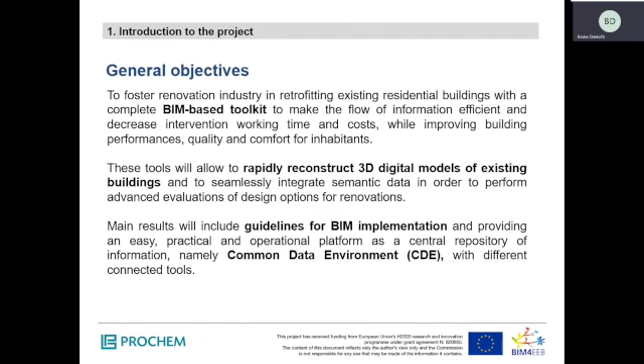I don't know if you have other slides or it's up to you, Jaroslav. Yes, so Bruno, I can follow the slides. Thank you very much, Bruno. Bruno is of course our project coordinator. So thank you very much for the sentences about the general objectives. You're welcome. Thank you, Alexander, and also Jaroslav. See you. Thank you very much, Bruno. Okay, so

What was our overall work plan? Basically, our project was divided into 3 phases: phase 1, 2, and 3. These days we are in phase 3. We are finalizing the project, but a lot of work was done during phases 1 and 2. We started with phase 1, which was to gather the requirements from the end users. Also, some technical research about linked data and ontologies was done.

After that, technical partners created the toolkit, a few tools that are also related to each other. So after gathering the requirements from end users, the toolkit was created, and in the end, phase 3 is to demonstrate the toolkit on the 3 demo sites picked for the project, the best representatives of different climate scenarios. We have the Italian pilot site, which is South Europe, the Finnish demo site, which is North Europe, and of course Poland, a Central European country.

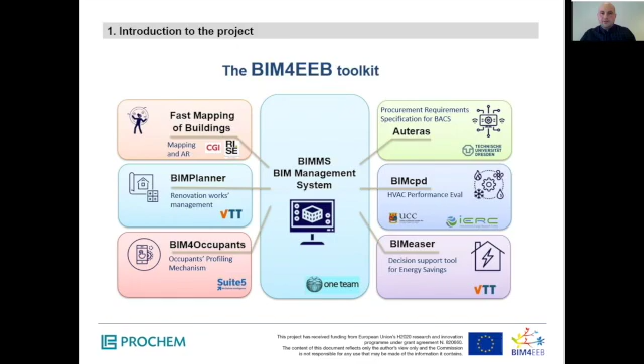And we have BIM Planner for renovation works management, and for the end users, the occupants, we have BIM for Occupants, and this platform will also be presented in the third part. So in the Polish case, we tested the BIMMS platform, fast mapping of buildings, BIMcpd and Auteras, and BIM for Occupants. Okay, we can go to the second part.

I will present the Polish site, the Polish building. The location is in Chorzów. Chorzów is near Katowice, in the south of Poland. This building is the oldest of the three buildings included in the BIM4EEB project. So we have a very old residential building. It was built in 1902. It has 5 floors, including 12 apartments and 3 commercial areas on the ground floor.

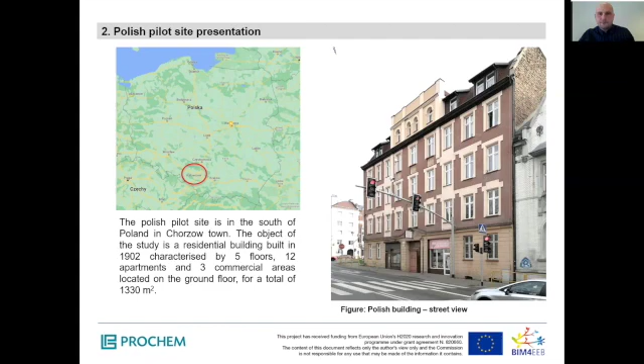Okay, what was the scope of the demonstration activities? In the beginning, to fulfill the project requirements, we had to install a set of sensors inside the apartments which joined the BIM4EEB project to measure conditions inside. And then these measurements were translated into our platform, and then we could assess the special indicators to show the result of the project.

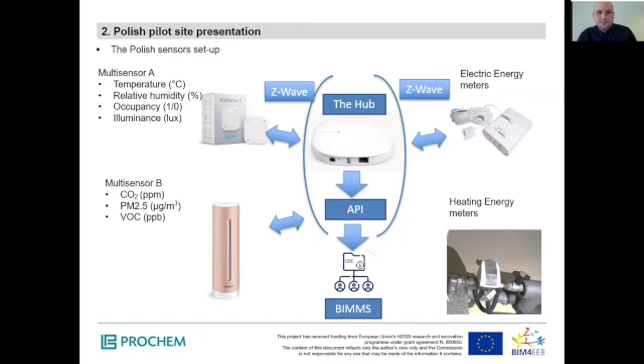And of course, for the project purpose, we had to use also the heating energy meters measurements to assess our project indicators in the final stage. You can notice some pictures from the installation. So of course, we have different apartments, different people, different size of apartments, and we have additional requirements from them.

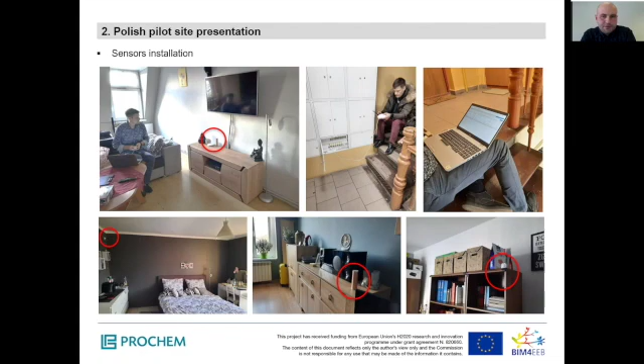Additional requirements also about the placement of the equipment. But anyway, the inhabitants from the buildings were very helpful for us, and I think it was very interesting from their point of view to be part of such an interesting European project. So after the installation of the sensors, this is the setup for the Polish case of the sensors. So mostly we have sensors in living rooms and bedrooms.

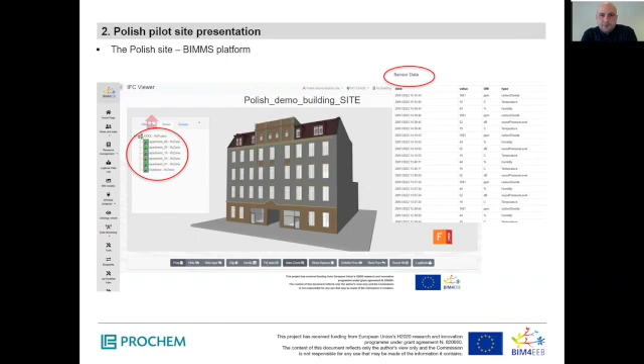And after the installation was finalized, we could start to demonstrate the tools on the Polish pilot site. In the third part of the workshop, there will be a deeper presentation of each tool, but just to give you a notice, the central platform is using the sensors data integrated in it, and for the renovation scenarios, we can use it easily by accessing the platform. Also, BIM for occupants and BIM-CPD are using the stream data from the sensors.

Additionally, for BIM for occupants, which is the platform for the inhabitants, we managed to provide a dedicated workshop for each inhabitant to show the possibilities of the platform and make it easier for them to take part in the project, because we are using the end users' feedback to assess the major indicators of the project.

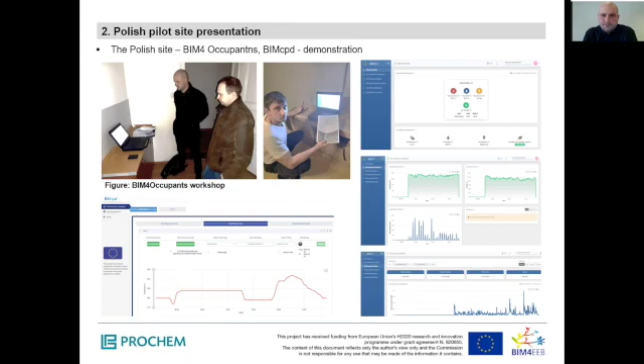And also in the Polish building, we have tested a very innovative toolkit, I would say, not only for the inventory stage, but mainly for the inventory stage, which is the fast mapping toolkit. Eva in the next part will present this in detail, but it's very interesting, and it's using laser scanning, and with importing to HoloLens, you can do a 3D inventory inside the virtual world. So I think this is the last slide in this part.

Do you have any comments on this stage? So I think we are in time, and on this part, I will ask Davide from one team to present the BIMMS platform. Davide, the floor is yours. Do you hear us? Yeah.

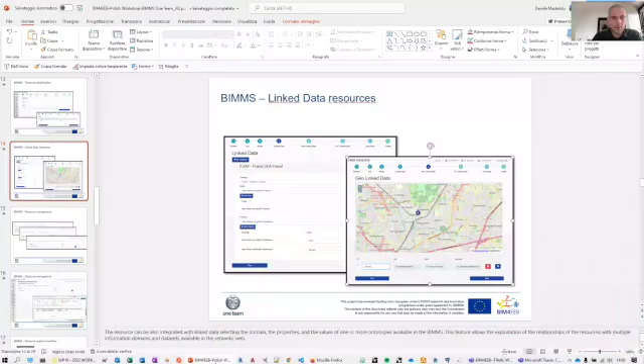Good afternoon, everyone. I share now my presentation. Okay, do you see my screen, I think? Yes. Okay, perfect. I leave out my webcam just to optimize the stream.

Okay, the BIM management system, as seen before, is basically the central part of the toolkit developed in the project. Basically, the main goal of the BIM management system is to optimize the information management, optimize how the data is managed, because we know that in buildings the data is so much, the life cycle is very complex, and if we do poor management, this could hinder strategic decisions and also the collaboration between parties.

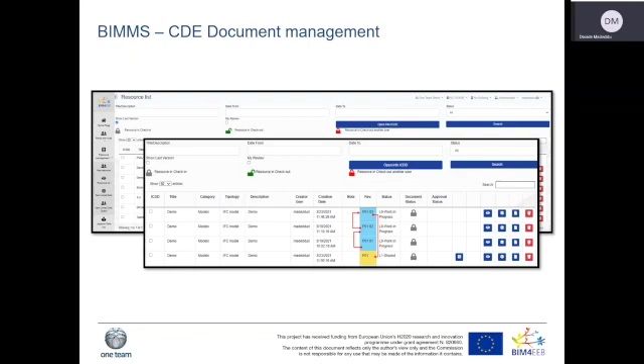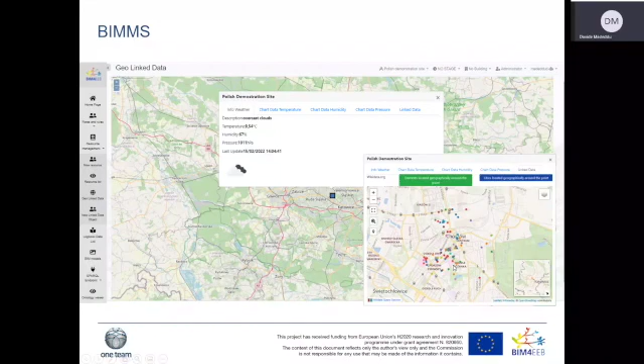Another important thing is that there are some functionalities that support the possibility to locate resources geographically, for example, the model, but also any kind of resource like a document or anything. And this is the screenshot where you see some locations of the resources in the Polish demonstration site, starting from the weather information, but also going down in the right side panel, where you can see some information about the important buildings that are nearest the main building, the demonstration site.

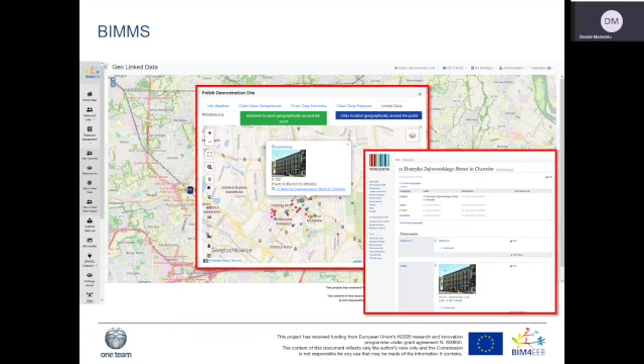For example, in these functionalities, you can ask the platform to give you all the important buildings that are located around the point where your building is. And you can see these buildings categorized by different uses. For example, there are church or institutional buildings. If you select one of them, you can get all the information that can be collected, for example, from Wikidata. Wikidata is an important database that stores all the data of Wikipedia. These functionalities can be used, for example, in design to get information about the nearest buildings to your design.

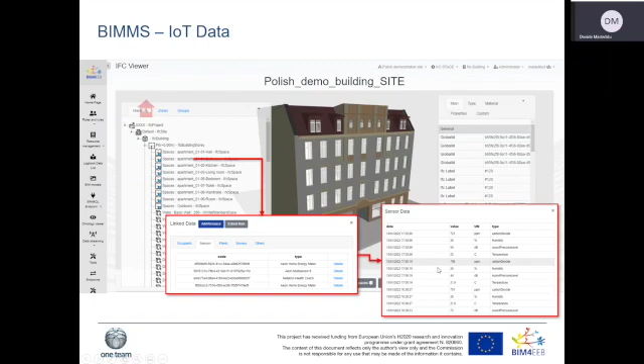We talked about IoT, talked about sensors, and here is the data that will be collected from inside apartments. Some apartments can be used as a demonstration. We put sensors, and in the BIM management system all the measurements can be stored, to be recorded and analyzed by other tools, like for example BIM-CDE and some others that you will see after my presentation. This data can also be viewed by selecting in 3D the space where you get the details of the sensor installed and also the measurements. This could be very, very helpful for a user to select visually where the sensor is and what the measurement is.

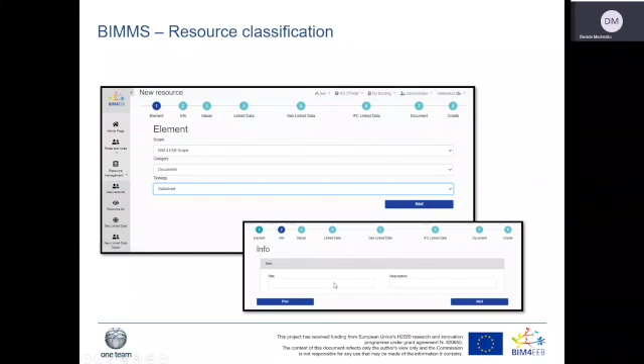Another important thing is that as a common data environment, we store the documents, but we need to classify these documents to better filter and to better identify the typology and category of the document, and also to make links between documentation. And when you store something, you can also add what we call linked data. Linked data is an important technology that is very, very powerful, that allows you to link, as the name says, any other data that can be found on other servers or other resources over the internet, and you can link this data together, and also give, as we saw before, a geographical location of where your data is.

And all these things are recorded, so you can also see the history of your document, where you can see which version the document is, when this document was created, and which people edited the document, and also add comments about that. This is important to see which user did something and shared something with someone.

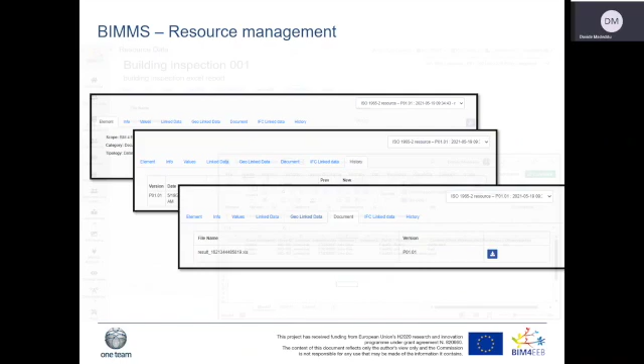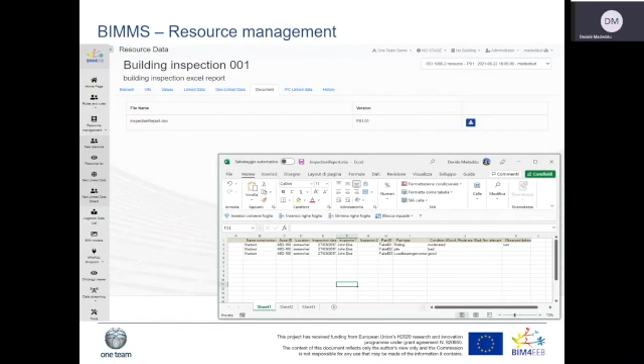And finally, about which kind of data can be put inside the BIM management system, we can put BIM models, basically in the IFC interoperability format, but you can also put any kind of documents, for example, Office documents, PDFs, Excel files, PowerPoints, images, and others. An important thing is that when you work with a team, some things need to be approved, and you can create approval workflows where you invite someone to approve some resources, and when the resource is approved, it can be shared and also published.

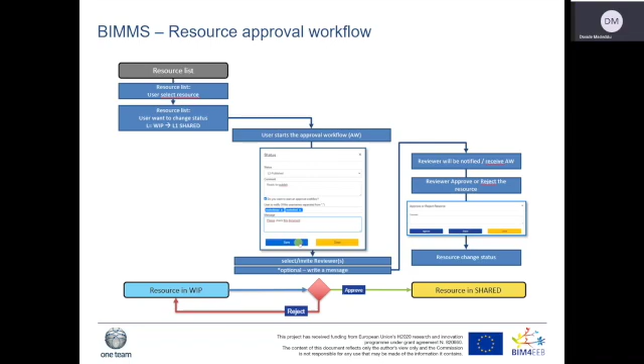This is something that is very, very common in design workflow, and this could be done in the BIM management system. We don't have much time to explain all the functionalities very well, but here there's a small video where you see the kinds of activities that can be done by the user. For example, creating resources, uploading the documents inside, viewing all the details.

And we can think that, for example, another user can log in to the system and also share their things, and make an approval workflow to get information and feedback about the documentation. All the workflows, data and functionalities are completely compliant with the new BIM standards, that is ISO standards.

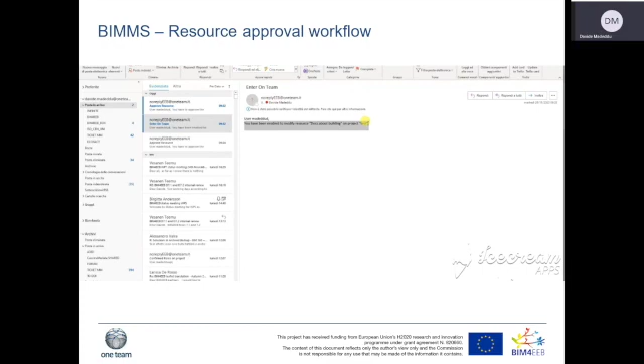Another important thing that you see now in the system is that for things you upload or activities you do in the BIM management system, there are functionalities that inform the user by email about the changes inside the BIM management system.

Another important functionality is the building logbook, another buzzword in this topic. It is a functionality that allows, for example, the owner to have every information about the building, starting from the documents or anything that happened in the documents, completely stored inside the BIM management system. This could be helpful in operations during the life cycle of the building.

And last but not least is the linked data SPARQL endpoint that allows registered users to access the data stored in the BIM management system in the form of linked data. Basically, we use linked data stored outside the BIM management system to retrieve some information, like the example before about Wikidata.

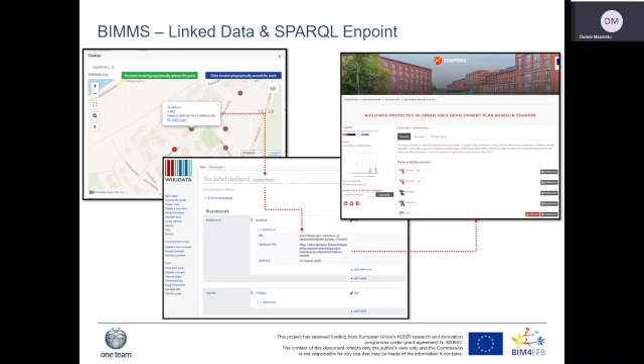But the data stored in the BIM management system can also be shared outside, giving a public SPARQL endpoint to any registered user to access the data inside. As we see, this is another example of how to use linked data. We can retrieve and share data to make some comparison or replace something inside.

An important thing, just to conclude about the functionalities and results of using the BIM management system: we elaborated some functionalities that allow, for example, storing the data of the BIM model. As you know, BIM models are sometimes very complex, and creating information in them is sometimes time-consuming. The traditional way is sometimes a bottleneck in upload and download. When you change something in the model, you have to upload the BIM model, and when you share it with someone, these people have to download it, and this continuous upload and download in the design chain is a bottleneck.

So we created a system where, instead of uploading and downloading files to share data, we use the REST API, where all the non-geometrical data can be shared using the REST API with the POST and GET methods to just exchange the data. This allows saving more than 70% in time and makes the design phase faster than before. We tried that with some things in IFC, and we want to expand.

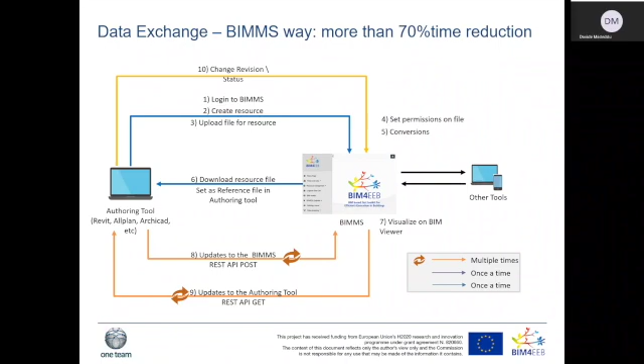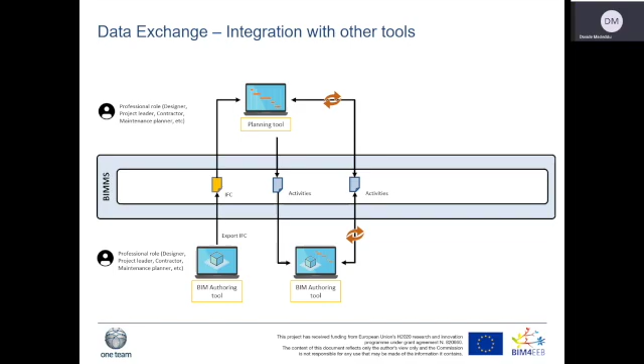And finally, we elaborated systems that can connect the BIM management system with other tools, first with the tools you saw in the presentations today about the BIM4EEB toolkit, but also other external tools like existing BIM authoring tools, planning tools, and every tool that can exchange data using APIs. This is very interesting because it allows exchanging data in a centralized, more efficient way.

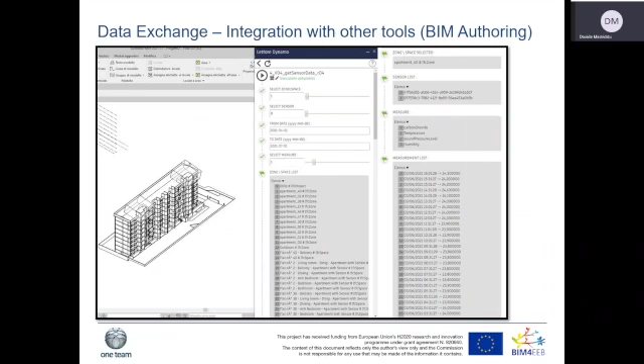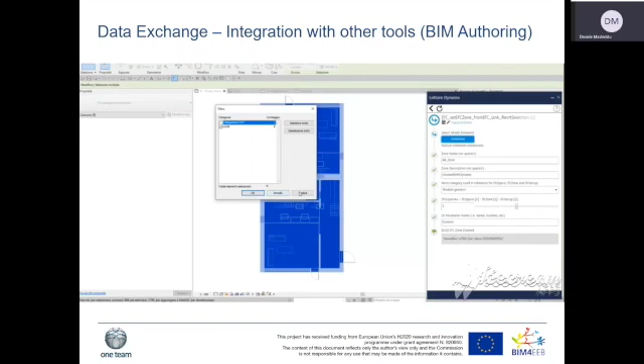This is an example using one of the most used authoring tools in the market, where you retrieve, for example, data from the BIM management system, from sensors, getting the graph of the temperature, or also creating things inside the BIM authoring tool. In this video, for example, we create spaces or some subdivisions inside the BIM authoring tool and post these changes to the IFC model already stored in the BIM management system.

And using the REST API, we make very fast changes in the model, avoiding repeated download and upload of files, which can be more time consuming.

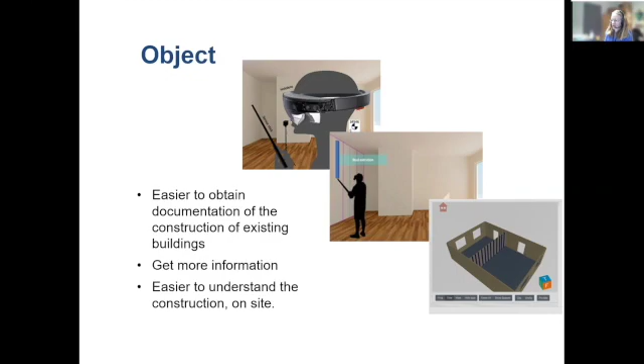By having this in a 3-dimensional model, it's easier to understand what you have and how the building looks like. So how is this possible, and how will this toolkit work?

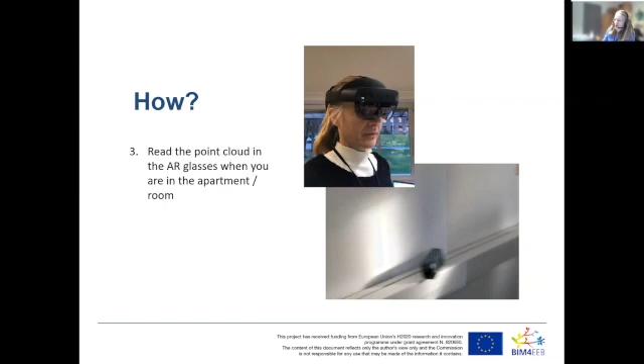But I also told you that this toolkit should give you more information than just the geometry. Because when you have the point cloud in the glasses, it's possible with your normal finger to click the corners of the point cloud and define it, say that this is a wall, click the corners and say this is a ceiling, this is a floor, and this is a window. Then the computer knows what it is, and it could create an IFC file of it.

By measuring those characteristics, you can detect if there is moisture or water pipes within the wall, because the sensors measure the difference in density and also the resistance of what's inside the wall. So by measuring capacitance and inductance, it's possible to detect if there are studs or other things behind the wall. It can also measure electricity activity, like if you have electrical cables behind the wall.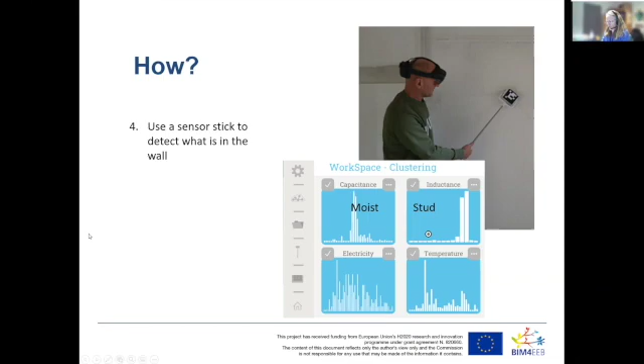Once you have this, you are able to create what you see, because you would like to store it as an IFC file in the BIMS platform later on. So when you have the glasses on, you can see the result from the sensor stick as different colors and dots. You can use the menu in the AR glasses and write studs - you just point with your finger and write the studs. In this case, we write 3 studs on the wall, and you can see they are not correctly placed because it's a bit difficult to have them in the correct place at once. So you have to align them, move them and rotate them so they come into correct position. Once you are satisfied with your creation, you have the possibility to create an IFC file that you then download to the BIMS platform so you can have it with your other drawings.

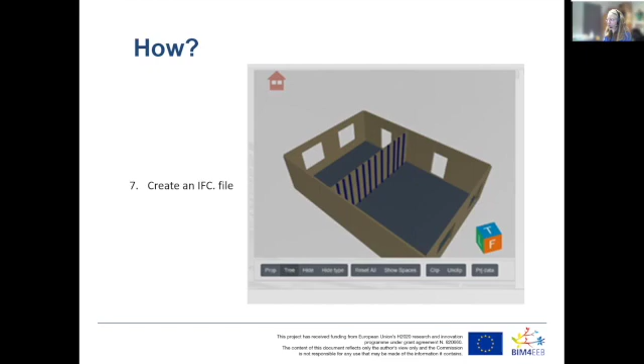I have just a few more slides about this equipment and this tool, what's new and what is already existing.

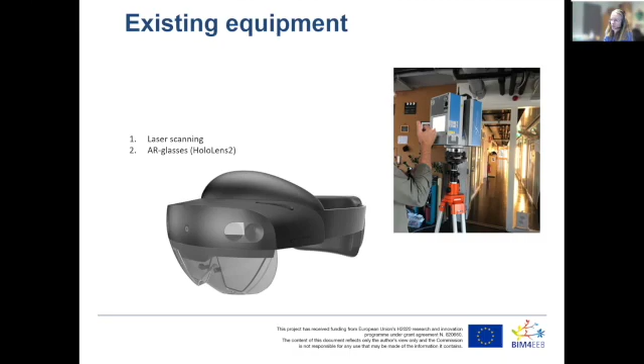The existing equipment, which hasn't been developed in this project, is the laser scanning equipment and also the AR glasses used. In this case, those are called HoloLens 2, AR glasses produced by Microsoft - those are already existing. What's developed in this project is the sensor stick, where all those meters are combined in the stick, and also the software which is on the HoloLens. We've called the software Polytech, and it's a Polytech app within the HoloLens that is used. Those are the two things that are new and developed in this project.

We were in Poland at your demo site in the beginning of February this year, and it was a nice trip. I would like to thank you, Alexander, for your hospitality, where we had the possibility to demonstrate and check the toolkit. When we were at your site in Poland, we made a laser scanning of an apartment on the demo site, and we also used the sensor stick to map and see some of the walls. We also created some IFC objects, not an IFC file of the whole apartment, but objects, because we only had 2.5 days when we were there, so most of it was demonstration of how it worked.

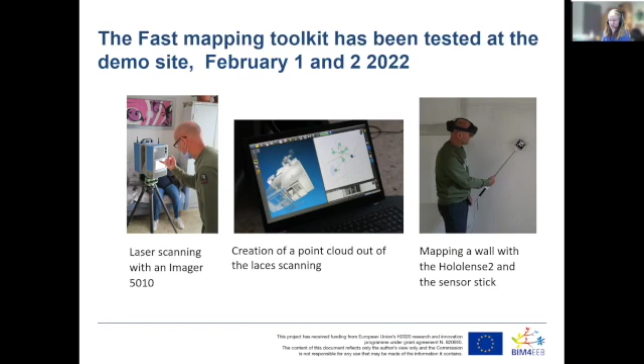Okay, that was my last picture. There are the contact details for me if anyone has questions afterward. Otherwise, please, if you have questions.

Hello everybody, my name is Konstantinos Tsatsakis. I'm coming from Suite5, an SME company based in Cyprus. Suite5 is an IT company, and as part of the activities performed in the project, we developed the BIM4EEB application, an application targeting end users of the building - the owners and inhabitants - as a way to examine the potential of collaboration with these two business stakeholders during the renovation process or post-renovation process.

The overall objective behind the delivery of the BIM4EEB application was to enable building inhabitants and owners to get access on the contextual information of the building environment. So in the project, we installed different types of sensing and measuring equipment in order to gather information that is required for different purposes and for different stakeholders.

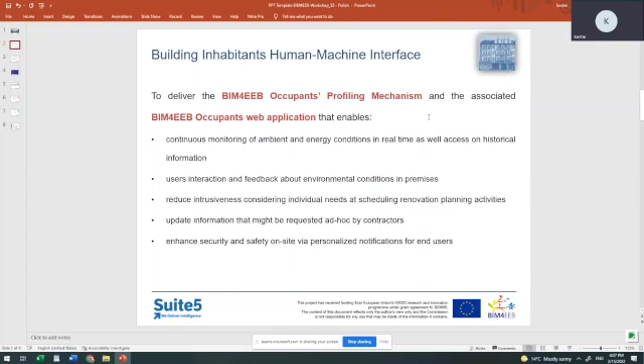This functionality can extend post-renovation, as the building manager may use it to notify inhabitants about specific conditions in the building environment. A final functionality gives building occupants the possibility to provide updates on specific conditions of the building environment.

This is a main bottleneck in the current state of the art, because the typical BIM management process starts with an initial building information model containing specific attributes that may change as the building evolves. The owners and occupants have clear understanding and knowledge of what's happening in the building, so they can actively contribute information related to specific attributes of the building.

For example, when it comes to the operation of the building, it's typical that there is reinstallation of some equipment. The user may install additional HVAC systems, like air conditioning. This information is very critical to include in the building information model to have a concrete model of the building. Therefore, we give building occupants the possibility to enrich the BIM by providing information about specific attributes of the building.

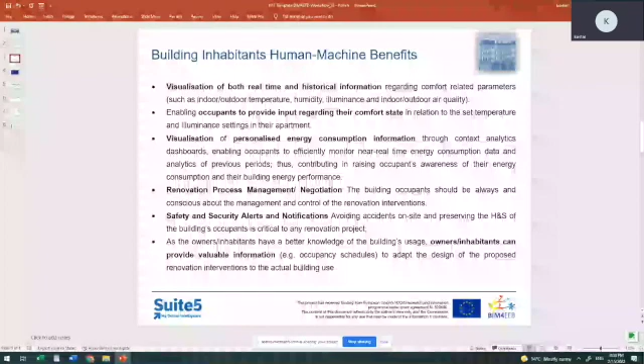In the project, we limited this functionality so users provide information having to do with energy devices. So if there's a new installation of an HVAC system or a domestic hot water system, large consuming devices, the users are prompted to update the information through the application.

I will now go to a demonstration of the application. So we have set up a test account here, and we have already logged in. I will show you later how this functionality works, in order to show you the different features of the application. On the left side of the screen,

you can see. Can you see the screen first? Yes, we can. Okay, good.

On the left side of the screen, you can see the different functionalities that I presented before. So I will not go into the details of each one of them as I presented them before. I will stick to the different views of the system.

So through the My Overview tab of the application, the user gets insight about the indoor environmental conditions of the building environment, getting insights about the different contextual conditions. Information about the temperature, humidity, illuminance from different building zones, either at apartment level or for specific zones of the building or the apartment, is available for visualization.

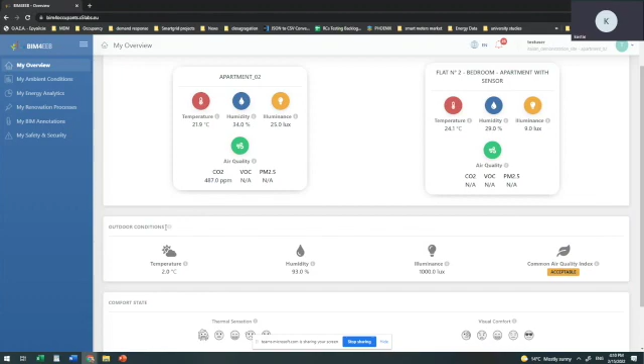As stated before, user interaction is supported by the application, and thus the user of the app may go and select a specific level of happiness, let's say, of preference based on the current conditions. So if the user is happy or not happy about either the thermal sensation or the visual comfort at this current moment, the user is prompted to provide feedback for the current condition in order to express a level of interest for the environment that he or she is placed in.

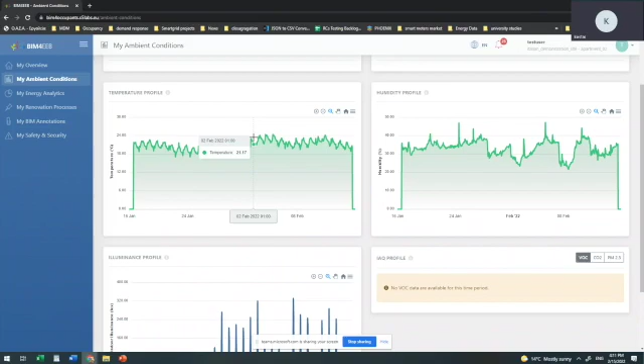Along with real-time information, as commented before, access to historical information is available, and the user can select a specific period for analysis and drill into the details of environmental conditions for temperature, humidity, and illuminance, as well as CO2, where data are also available for monitoring.

Along with environmental conditions, access to energy-related data is visible through the dedicated view of the system. The user has access to the time series of information about energy consumption. Insights can be extracted by monitoring the time series. Aggregate statistics are also visible for the end users.

Also, time period statistics, time filtering is also visible, where the user can quickly access the aggregate consumption at specific time granularity. For example, here by having the week statistics, we have per week the aggregate information about consumption, and thus quick insights can be extracted.

As you can see here, there is a deviation in the week consumption level, and thus the user is getting informed about the trend of consumption during a specific period that has been selected for analysis.

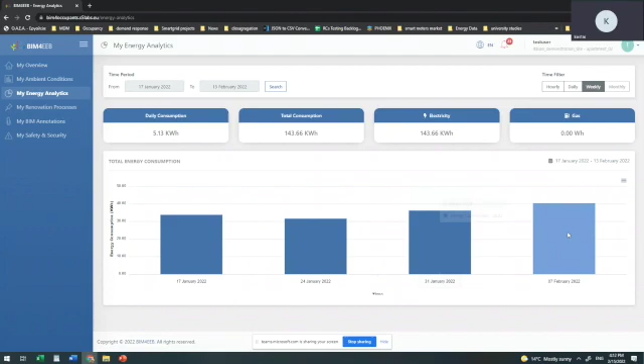For this case, we have past activities defined here, and thus there is no action that can be performed by the user. But the idea is that the user can get into this view and modify, renegotiate specific parameters of interest for the renovation process.

Related to this are the safety and security events that were commented before, where the user is getting insights about specific safety or security conditions. There is a typology based on the status, if we're talking about finished events, ongoing events that are happening now, today, or upcoming events that will happen in the future, as well as a level of importance that is defined by the stakeholder that is triggering the event.

If it's a critical event, if it's not a critical event, and if there's a situation that is of high importance for the building. Also, the user can report a safety incident. Apart from getting insights about safety incidents, the user is prompted to provide information about a specific condition.

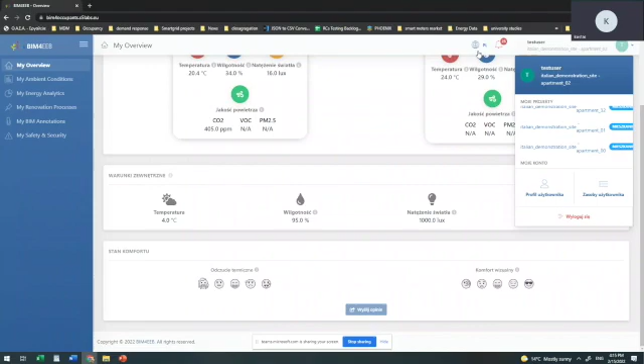Details about the user profile can be defined here, where the user is prompted to provide information about the type of user and the age group, which are mainly statistics-related, for better profiling of the users that are enrolled in the project. The user may delete the account or update the password for logging into the project.

And also we have a view that contains the full list of attributes of entities that have been associated to this apartment, which is mainly useful for the end user in order to define personal names for the different types that are examined in the project, in order to have a more friendly view of the different names that are visible through this application.

I will log out again in order to show also the login functionality of the application. A username and a password is provided to log in. Of course, we have also the sign-up functionality at the beginning, which is very important as a process, where the user is prompted to define a username, a password, and also a user token in order to link the specific user with a specific set of data that is contained in the BIMMS platform that was presented before.

So the BIMMS platform is the one that contains, let's say, the user's database: the full list of users that are associated with specific zones and therefore with specific data. And therefore any other application, and thus the BIM for occupants application, is prompted to exploit this linkage by providing the unique token that is available from the BIMMS platform, copying this information to this application, and then being able to retrieve the personalized data for each user that is enrolled in the project.

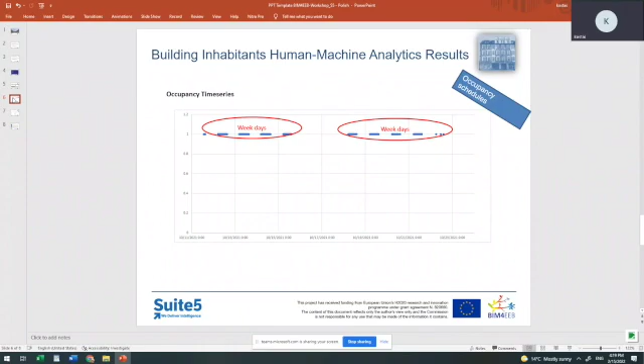Another type of analysis that we're performing in the project has to do with the analysis of occupancy data. We gather details about occupancy as extracted from a sensor that is installed in the premises. Occupancy-related information is further analyzed by aggregating it in order to extract, let's say, data lakes that contain occupancy events. From this analysis, and removing the outliers that we have in the data, we can extract the typical patterns of occupancy, information that enables us to better understand the level of occupancy in the building environment.

The important thing here is that we don't aim to track the occupancy level in real time, but rather to extract occupancy profiles, so aggregate statistics of occupancy, that can help us better simulate the operation of the building. The typical occupancy profiles available nowadays are mainly average statistics from the analysis of a large volume of buildings. But the literature shows that this aggregation does not fit each case, and that it's better to estimate the occupancy level per building in order to have more accurate profiling of the building, and therefore more accurate simulation of its operation.

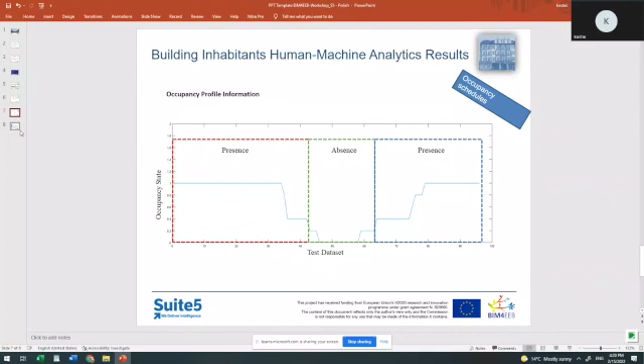And that was the very last part of my presentation.

We have one comment from Mr. Zawistowski. He's saying it was very interesting.

Okay, so the last part of the demonstrated tools presentation will be the BIMcpd platform, and it will be presented by UCC representatives, which is Ion. So, the BIMcpd tool is made up of a few different components. There's the constraints checking tool, the performance evaluation tool, and the data management tool. So we'll go through the data management tool initially.

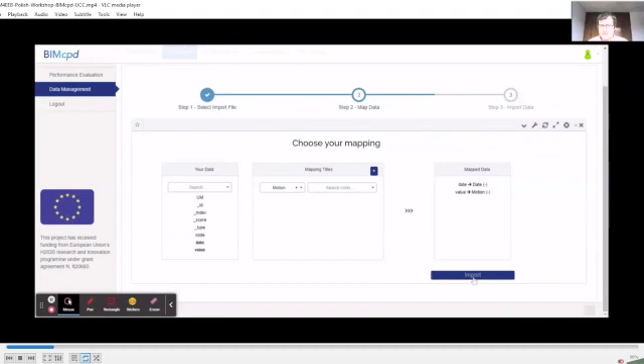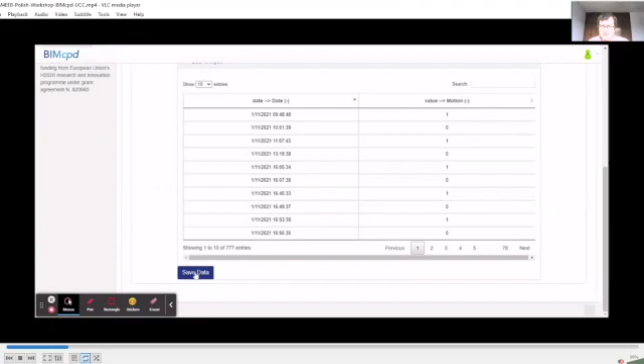So here you have motion data being imported, so it's basically the date and the motion readings of this specific sensor. That can be uploaded into the database, and then all this data can be viewed in the performance evaluation tool, which we'll go into in more detail shortly. Now on the screen, you can select the data that you have just uploaded. That was the sensor data just uploaded to the system, and you can view and analyze it as you wish.

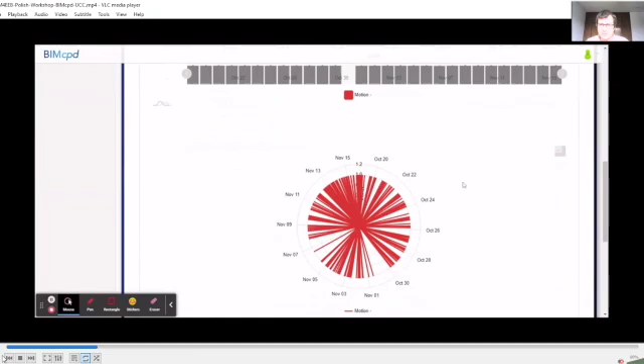We'll be going through this process in more detail shortly again. So it'll just show the data here. That was a CSV file that was uploaded to the system, so you can see all the motion there in that data file.

Another component of the data management tool is the IFC ontology. You can select an IFC file to analyze, and it will then extract all the different components in that IFC file, and they can be searched and sorted as you wish to view what's in the file, and to select which one you want to view specifically.

So then, if we move on to the performance evaluation, that is the next tool. Here, if we look at the different sensors, we've just done a search for Polish, for all the sensors from the Polish demo site. So you can see the list of them here. There are two different ones for apartment 5. There are, I think, at least 3 for apartment 8.

Here we want to compare the temperatures in a few different apartments. That's under the multi-sensor, and we'll also select the outdoor temperature just for comparison. We select the chart type, which will be a comparison chart, and then we select what we want. These are all the different variables that have come in with the sensors.

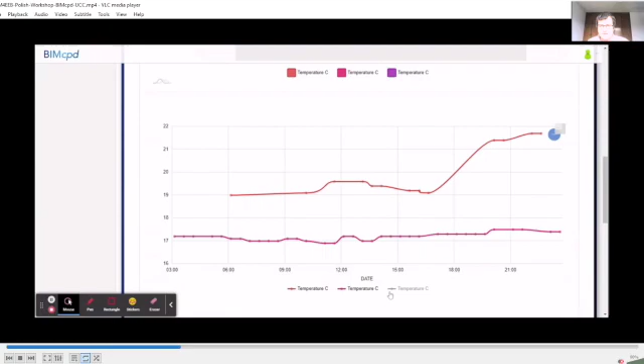So then if we just select out one of the apartments, and we select the temperature and humidity for each of them, we can just check the thermal comfort values for this apartment. So this is analyzing this data, and we'll just see it mapped here. You can switch off, but in the lower graph we can see that the average humidity would be around 50, over 50%, and then the temperature is somewhere around 20 degrees Celsius.

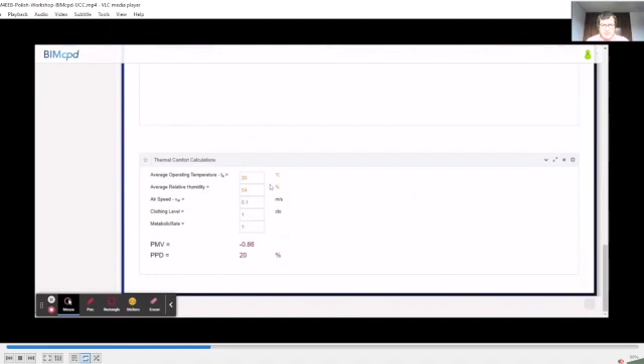So then there's this thermal comfort calculations tool. If it's in orange, that means it has been calculated from the readings that have been selected above. So the average temperature for that day was 20 degrees in the apartment, and 54% was the average humidity. These are the thermal comfort calculations from the Berkeley University thermal comfort tool, PMV and PPD. So you can see that it's not reaching the ASHRAE standards for thermal comfort in that apartment for that day.

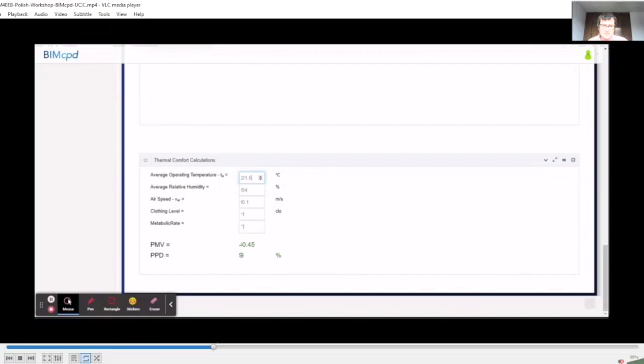So it would have to be changed to 21.5 degrees. So the temperature should be increased by 1.5 degrees to reach the ASHRAE standards that had been set. So that's just for that apartment for one day.

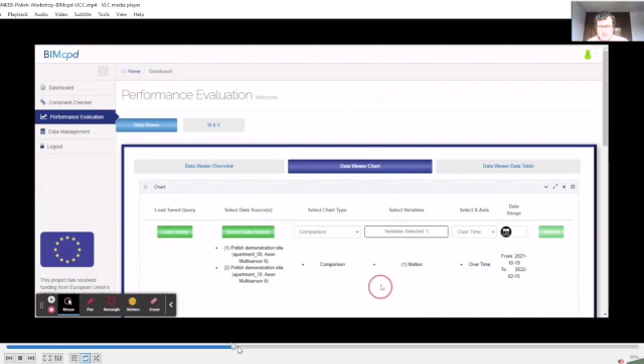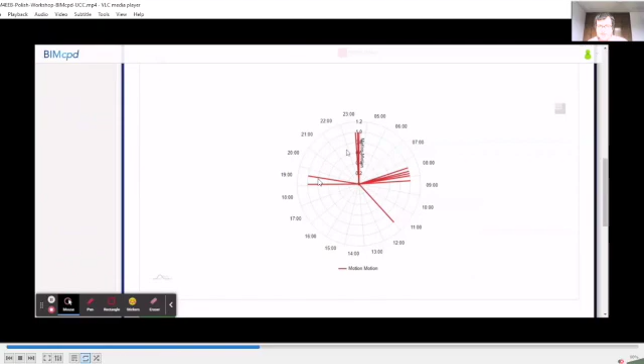Then again, if we check, I think it's this one that you can select in on the motion sensors, and to compare, you can see for that day that the person was out for most of the day, and then at home for some time, and then to sleep again. So I think there's another apartment analysed as well, and again, there isn't loads of movement, but you can see the person is out for most of the day, back for a small bit, and then probably asleep.

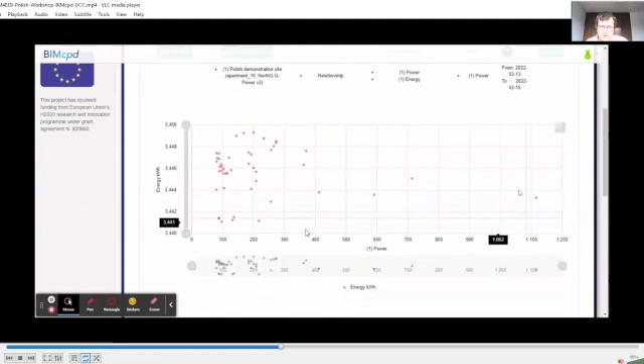You can also compare the relationship between two different variables if you want. So we've done comparisons up to now in the examples, but if we want to just view the relationship, say between power and energy, we can map those against each other and see if there's a correlation. So you can see all the variables there, the data and how it corresponds, and then you can remove any outliers.

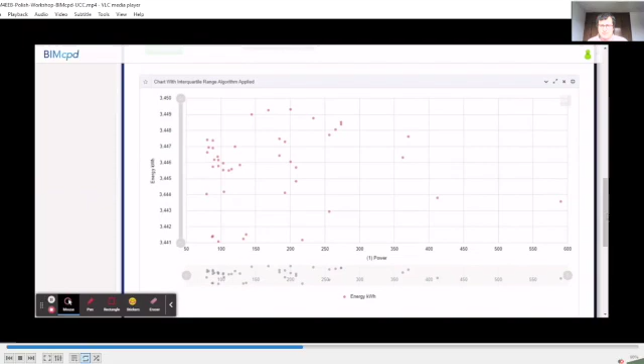So it has highlighted these possible outliers, but if we want to keep most of them and just remove the last two of the outliers, it'll redraw the chart, and then you could save the data if you wish from there. So yeah, that's the data again.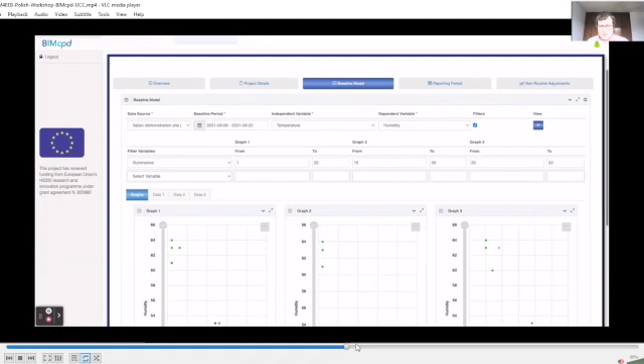So next we'll go on to the M&V tool. So here we set up temperature and humidity, and if we want to set a filter of the illuminance, you set that up. This is setting up a baseline model for a site before the retrofit, and then you click to view, and it graphs the temperature versus humidity. Then you can set up your models, and it will graph those models, and then you have to click whether to accept those models that you've set.

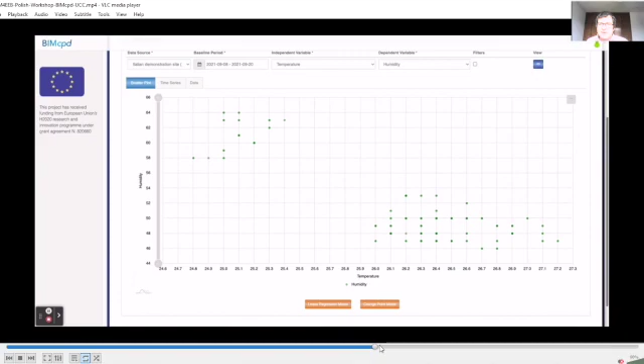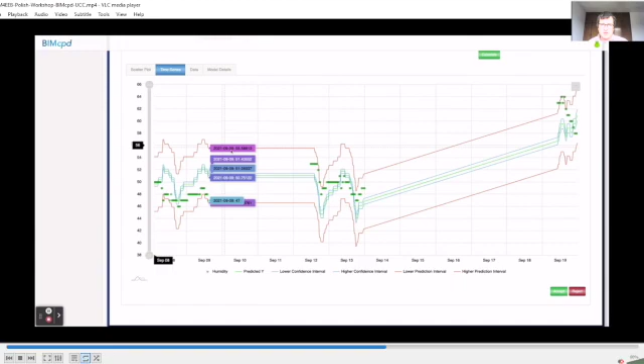So then once those are set up, you run a linear regression model, and you set the confidence interval that you wish, and it will then graph the data and the scatter plot, and you can view it in time series. You can view the data specifically that you want, and then the last one is the model details. If you want to view those details, then you accept the model that has been calculated, and then you move on to the reporting period.

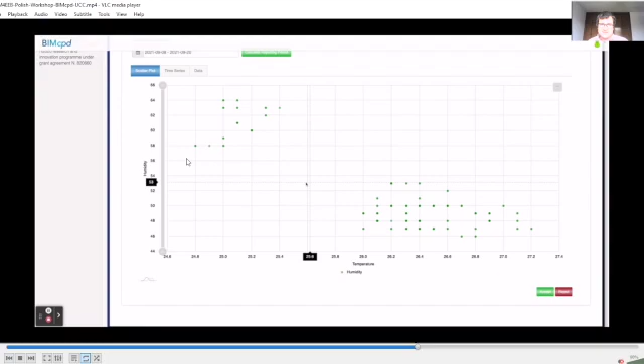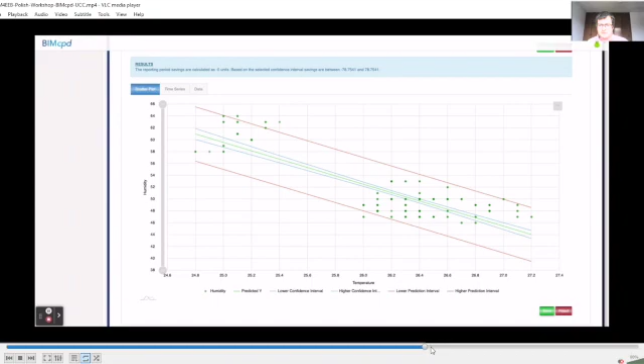You set up the dates you want for the reporting period for the data, and we'll just move it on. Again, you can view the scatter plot, the time series, and the data if you wish, and it will plot the data. And then if there are any non-routine adjustments that need to be made to the data, you can do that in the last section of the tool.

So the last section of BIMcpd is the constraint checking tool. So this is where the HVAC systems and the different components, so lighting components and sensors, optimum locations are suggested for those components.

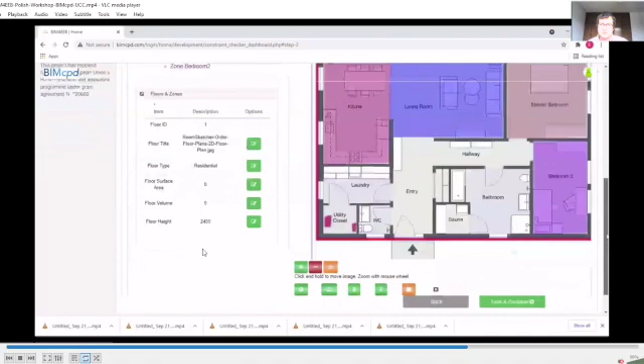So you can set up your project initially and select out the different zones, the floors and the zones you want. So in this demonstration, there's 4 different zones set out. Then you set out the components that you wish to process. So in this example, it's HVAC, sensors, and lighting, and you select out the different specific components that you wish to add to the system.

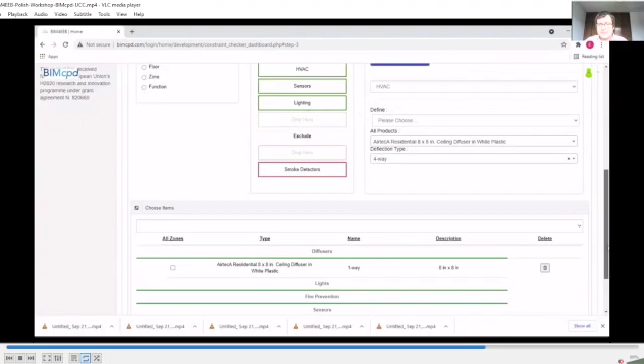So for each of the components that you wish to set it up for. So they're the sensors for CO2, humidity, and temperature, and you want to select the specific products. So then you save and continue on to the next, and it will suggest locations.

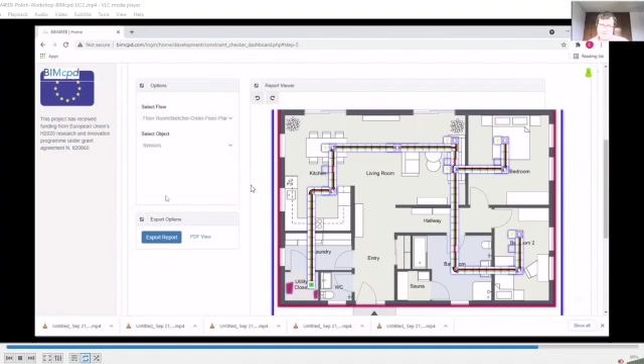So for the HVAC, it selects the ducting and the diffuser points, and similarly for the lighting and the electrical system, it'll set out where the lighting units are and then the wiring system, and then it creates a report based on that, where the placing of the suggested units is drawn, and then it lists out the different quantities of the different components, and you can create a report there.

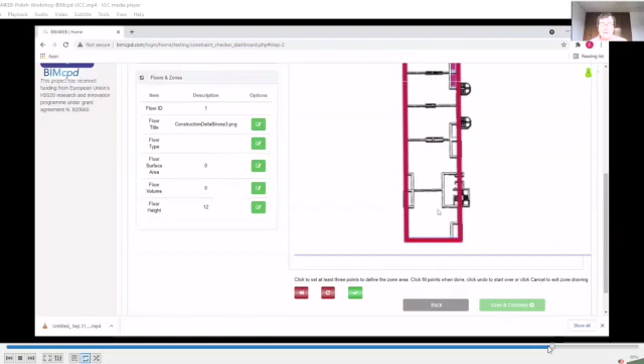So then, just to go back to setting up the actual floors and the zones, this is where you'd do it. So you've to draw out the specific zones that you wish, and that will then be processed. So that's how you do it, and you set the zone type, and you save the zone, and it'll then calculate. So that's for setting it up, and you can set up the different changes, the zone area, the lux level you want, and sections like that.

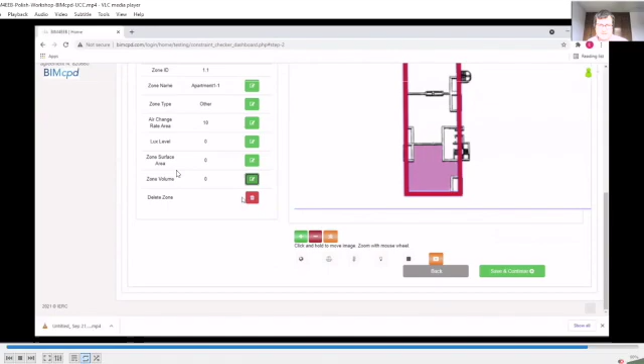You also need to set where the ducting will start, where it comes in that floor, and similarly where the electrical board is for the electrical and the sensor and the lighting systems as well.

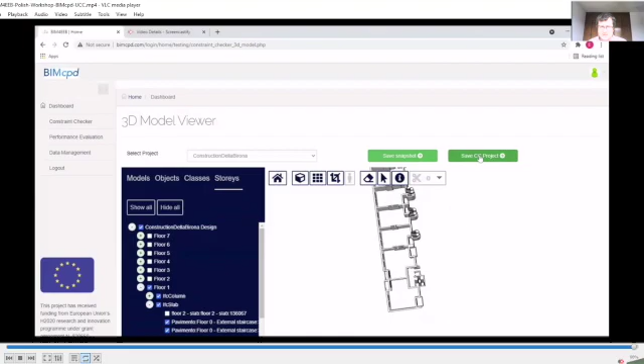So that's it. Then the final section is the BIM. We have a 3D model viewer as well, so you can view it, and if you want to take snapshots from the 3D model viewer, that can then be used in the constraint checking tool. That's where this is done. So you can zoom in on a specific floor or components that you wish from the IFC file. Yeah, that's my presentation.

What is also very important, you can notice that the whole toolkit is a cloud-based toolkit, so you need only the internet connection and web browser to access the tools. So I think this is also a big strength of the toolkit, that it is cloud-based.

Okay, so we are finalized with point 3 of today's workshop with the toolkit presentation. We are probably a bit before the time, so the next one we can spend probably 10 minutes, not 5, like it was set up in the agenda.